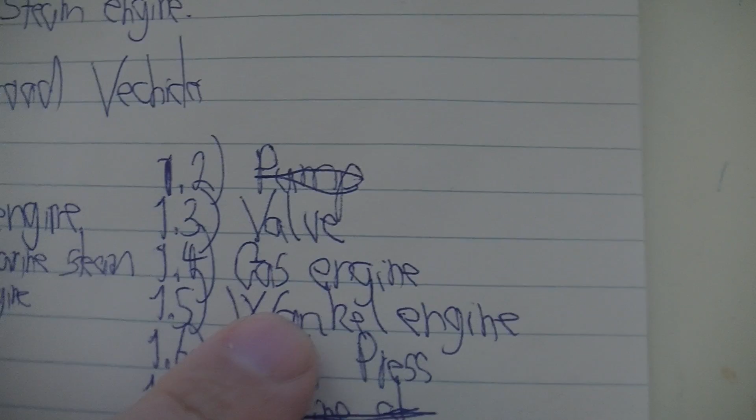But let's continue. Next time is a gas engine, a fruit press, something weird, then I continue there. That will take many days, but that's fine.

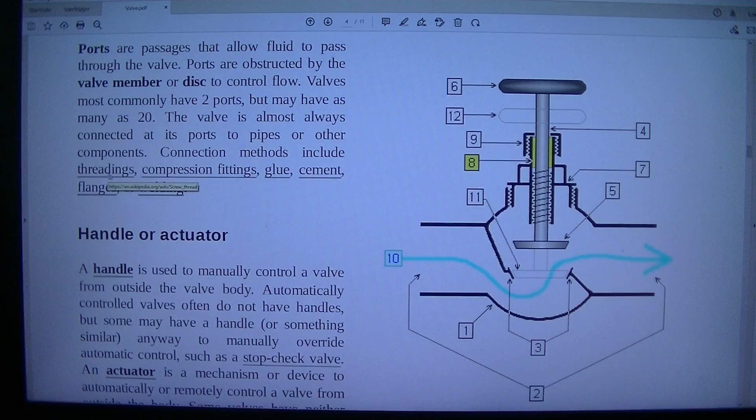I have many hundreds of days alone in my apartment. I've got plenty of time. I don't have money, but I have plenty of time.

But of course I should get out. I should travel, meet some people or something, not just sit home alone, but there's nothing to do about that right now.

Could do that next summer. Next summer I'll have $500 more every month. But not if I lose all my subscribers doing this, then I'll have less.

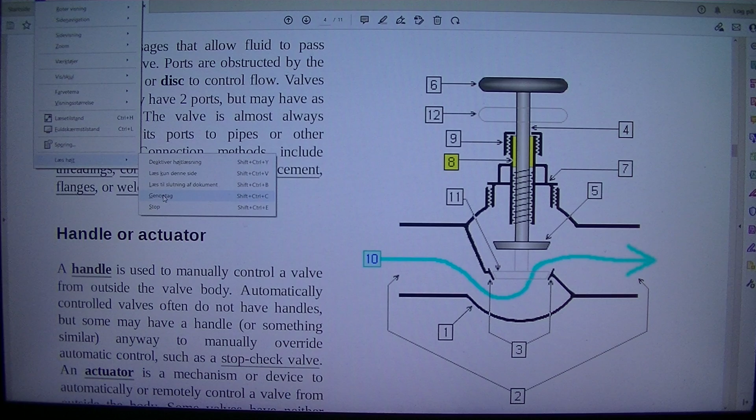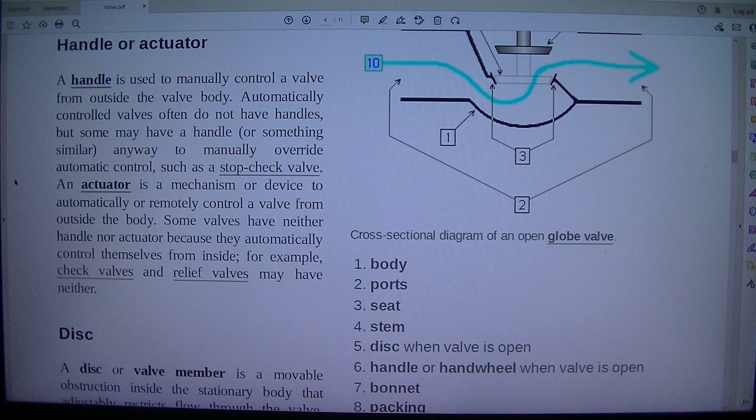Continuing: methods include threadings, compression fittings, glue, cement flanges, or welding. Handle or actuator: a handle is used to manually control a valve from outside the valve body. Automatically controlled valves often do not have handles, but some may have a handle or something similar anyway to manually override the automatic control, such as a stop-check valve.

An actuator is a mechanism or device to automatically or remotely control a valve from outside the body. Some valves have neither handle nor actuator because they automatically control themselves from inside. For example, check valves and relief valves may have neither. Disc.

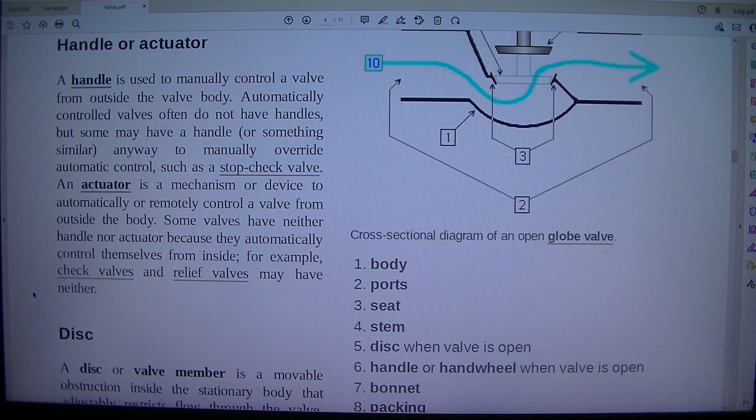Valve disc: a disc or valve member is a movable obstruction inside the stationary body that adjustably restricts flow through the valve. Although traditionally disc-shaped, discs come in various shapes. Depending on the type of valve, a disc can move linearly inside a valve or rotate on the stem, as in a butterfly valve, or rotate on a hinge or trunnion, as in a check valve.

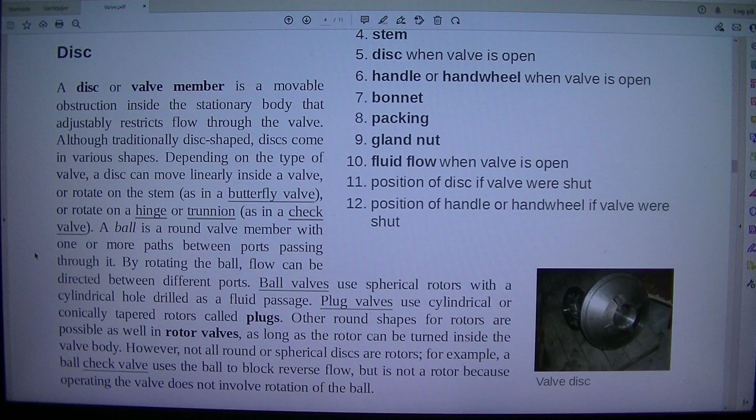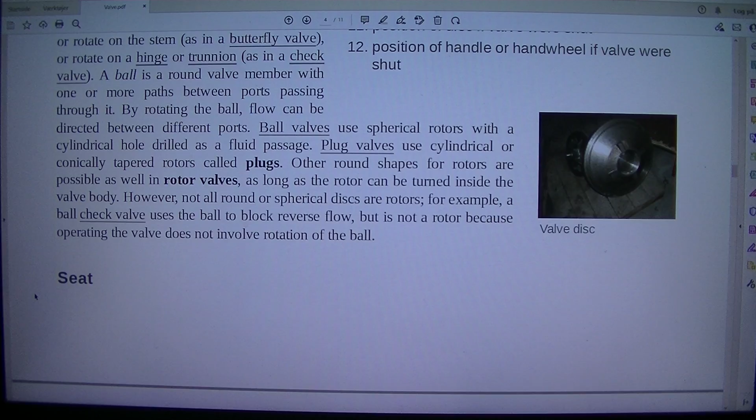A ball is a round valve member with one or more paths between ports passing through it. By rotating the ball, flow can be directed between different ports. Ball valves use spherical rotors with a cylindrical hole drilled as a fluid passage.

Plug valves use cylindrical or conically tapered rotors called plugs. Other round shapes for rotors are possible as well in rotor valves, as long as the rotor can be turned inside the valve body. However, not all round or spherical discs are rotors.

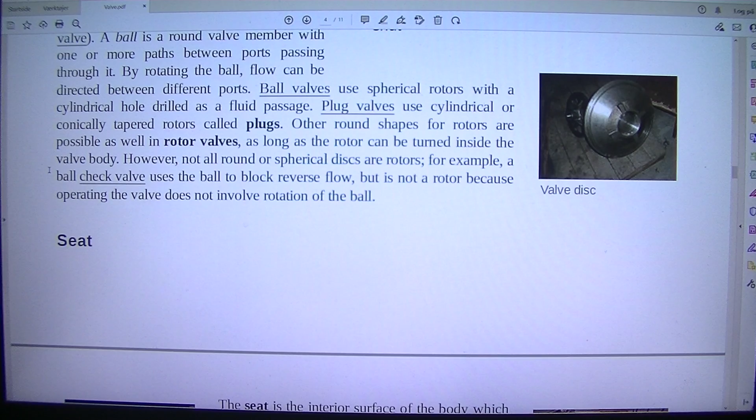For example, a ball check valve uses the ball to block reverse flow, but is not a rotor because operating the valve does not involve rotation of the ball seat. The shut-off butterfly valve for a Francis Turbine at Gordon Power Station, Tasmania, and a ball valve.

The seat is the interior surface of the body which contacts the disc to form a leak-tight seal. In discs that move linearly or swing on a hinge or trunnion, the disc comes into contact with the seat only when the valve is shut.

In discs that rotate, the seat is always in contact with the disc, but the area of contact changes as the disc is turned. The seat always remains stationary relative to the body.

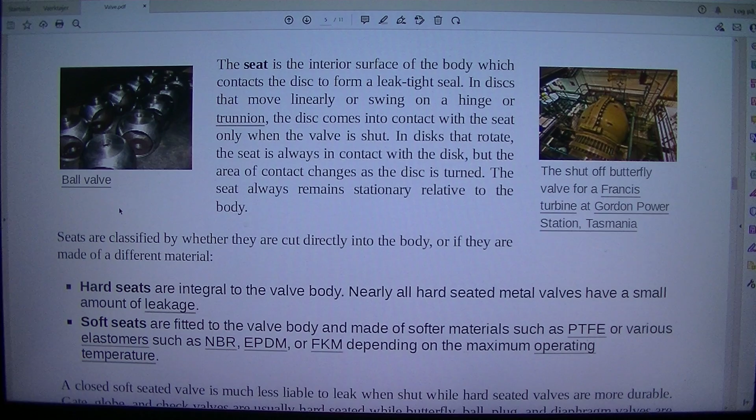Seats are classified by whether they are cut directly into the body, or if they are made of a different material. Hard seats are integral to the valve body. Nearly all hard-seated metal valves have a small amount of leakage.

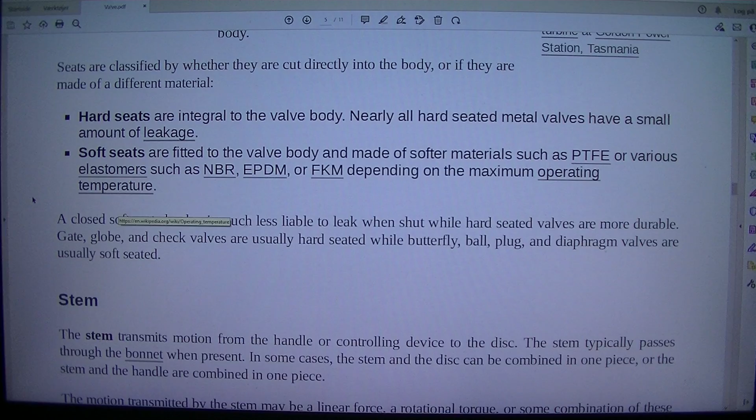Soft seats are fitted to the valve body and made of softer materials such as PTFE or various elastomers such as NBR, EPDM, or FKM, depending on the maximum operating temperature. A closed soft-seated valve is much less liable to leak when shut, while hard-seated valves are more durable. Gate, globe, and check valves are usually hard-seated, while butterfly, ball, plug, and diaphragm valves are usually soft-seated.

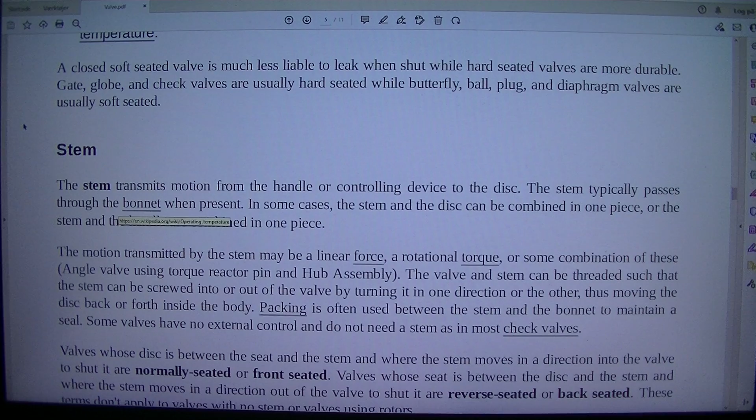Stem: the stem transmits motion from the handle or controlling device to the disc. The stem typically passes through the bonnet when present. In some cases, the stem and the disc can be combined in one piece, or the stem and the handle are combined in one piece.

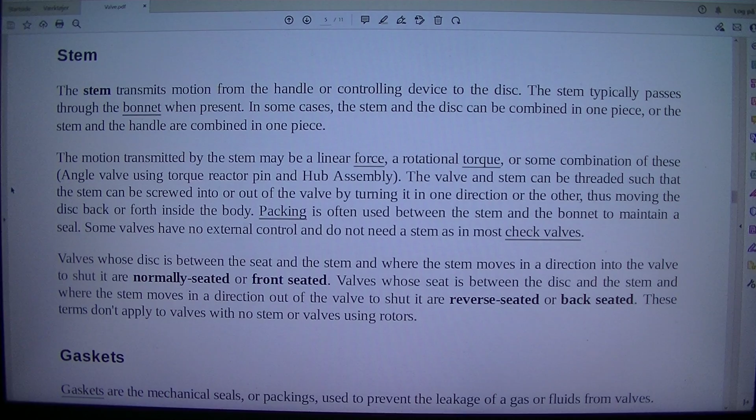The motion transmitted by the stem may be a linear force, a rotational torque, or some combination of these. An example is an angle valve using a torque reactor pin and hub assembly.

The valve and stem can be threaded such that the stem can be screwed into or out of the valve by turning it in one direction or the other, thus moving the disc back or forth inside the body. Packing is often used between the stem and the bonnet to maintain a seal.

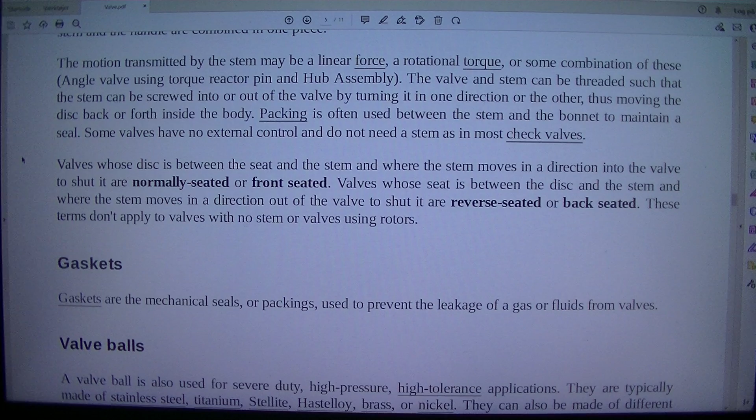Some valves have no external control and do not need a stem, as in most check valves. Valves whose disc is between the seat and the stem, and where the stem moves in a direction into the valve to shut it, are normally seated or front-seated. Valves whose seat is between the disc and the stem, and where the stem moves in a direction out of the valve to shut it, are reverse-seated or back-seated. These terms don't apply to valves with no stem or valves using rotors.

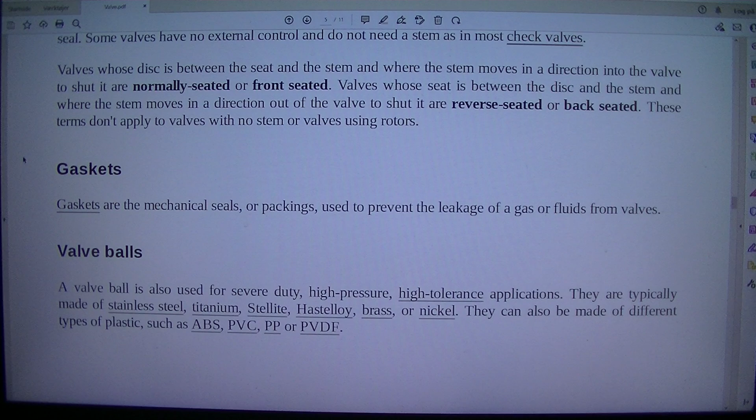Gaskets are the mechanical seals, or packings, used to prevent the leakage of a gas or fluid from valves.

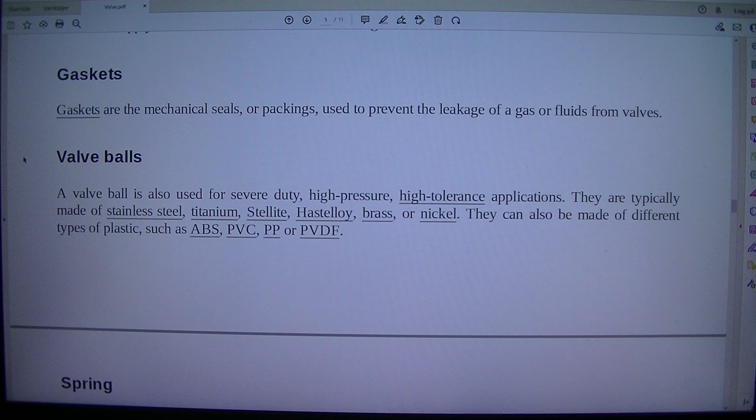Valve balls are also used for severe duty, high pressure, high tolerance applications. They are typically made of stainless steel, titanium, stellite, hastelloy, brass, or nickel. They can also be made of different types of plastic, such as ABS, PVC, PP, or PVDF.

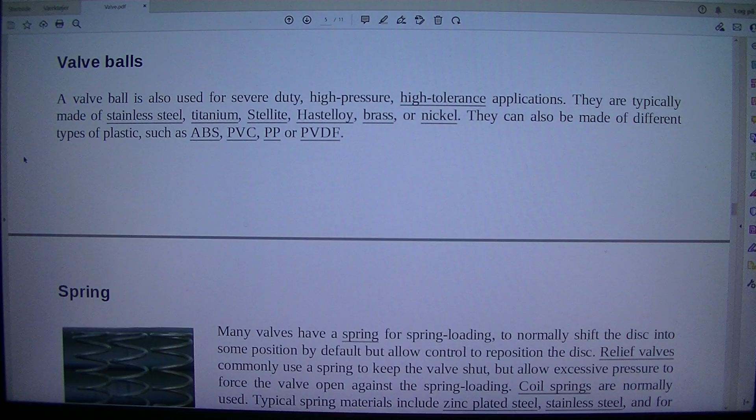Springs, including Inconel X750 springs, are used in many valves for spring loading, to normally shift the disc into a default position but allow control to reposition it. Relief valves commonly use a spring to keep the valve shut, but allow excessive pressure to force the valve open against the spring loading. Coil springs are the most common. Typical spring materials include zinc-plated steel, stainless steel, and for high-temperature applications, Inconel X750.

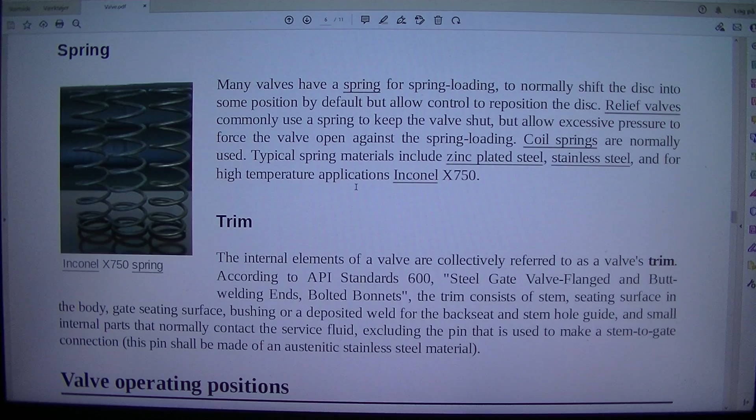The internal elements of a valve are collectively referred to as the valve's trim. According to API standard 600, for a steel gate valve with flanged and butt welding ends and bolted bonnets, the trim consists of the stem, seating surface in the body, gate seating surface, bushing or a deposited weld for the back seat and stem hole guide, and small internal parts that normally contact the service fluid, excluding the pin used to make a stem-to-gate connection. This pin shall be made of an austenitic stainless steel material.

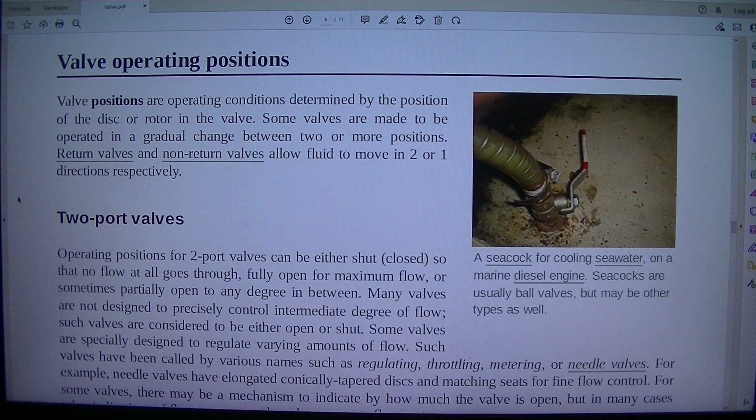Valve operating positions: a seacock for cooling seawater on a marine diesel engine is usually a ball valve, but may be another type as well. Valve positions are operating conditions determined by the position of the disc or rotor in the valve. Some valves are made to be operated in a gradual change between two or more positions. Return valves and non-return valves allow fluid to move in two directions or one direction respectively.

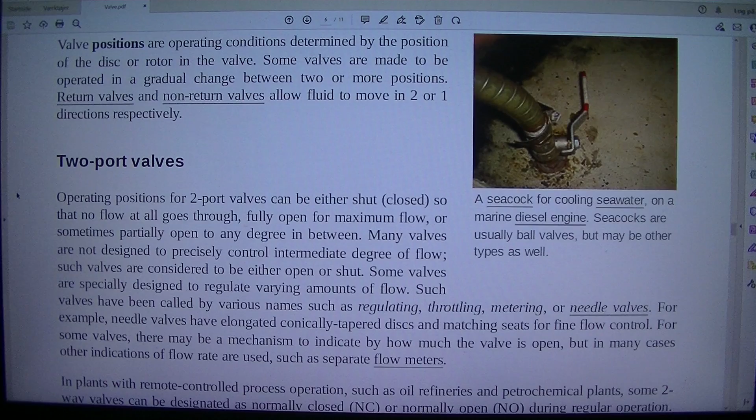For two-port valves, operating positions can be either shut, closed, so that no flow at all goes through, fully open for maximum flow, or sometimes partially open to any degree in between. Many valves are not designed to precisely control an intermediate degree of flow; such valves are considered to be either open or shut. Some valves are especially designed to regulate varying amounts of flow. Such valves have been called by various names, such as regulating, throttling, metering, or needle valves. For example, needle valves have elongated, conically tapered discs and matching seats for fine flow control.

For some valves, there may be a mechanism to indicate by how much the valve is open, but in many cases other indications of flow rate are used, such as separate flow meters.

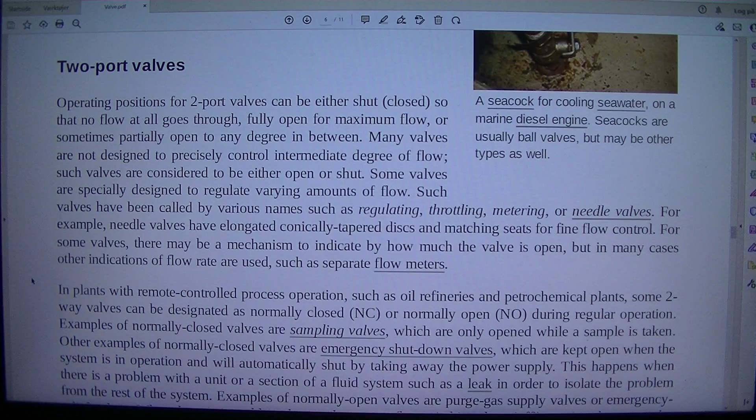In plants with remote-controlled process operation, such as oil refineries and petrochemical plants, some two-way valves can be designated as normally closed, NC, or normally open, NO, during regular operation. Examples of normally closed valves are sampling valves, which are only opened while a sample is taken. Other examples are emergency shutdown valves, which are kept open when the system is in operation and will automatically shut by taking away the power supply. This happens when there's a problem with a unit or a section of a fluid system, such as a leak, in order to isolate the problem from the rest of the system.

Examples of normally open valves are purge gas supply valves or emergency relief valves. When there is a problem, these valves open by switching them off, causing the unit to be flushed and emptied.

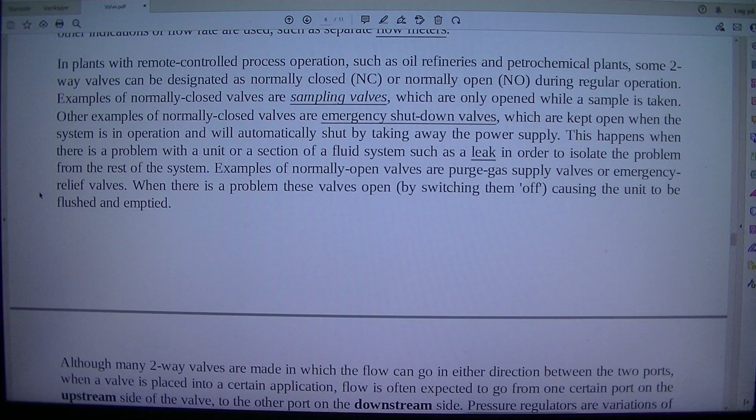Although many two-way valves are made in which the flow can go in either direction between the two ports, when a valve is placed into a certain application, flow is often expected to go from one certain port on the upstream side of the valve to the other port on the downstream side.

Pressure regulators are variations of valves in which flow is controlled to produce a certain downstream pressure, if possible. They are often used to control the flow of gas from a gas cylinder. A back pressure regulator is a variation of a valve in which flow is controlled to maintain a certain upstream pressure, if possible.

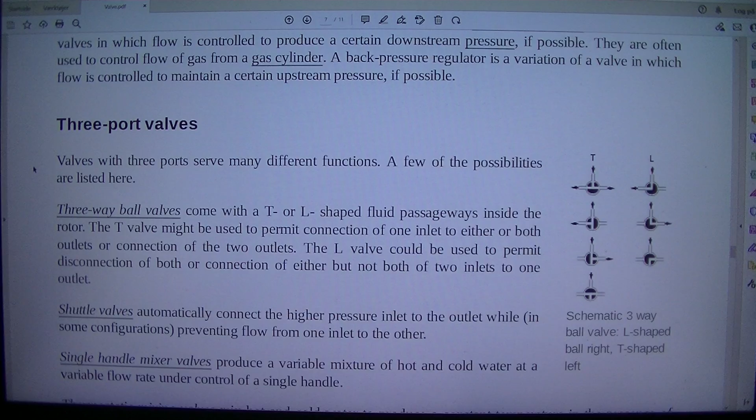Three-port valves: as shown in the schematic of a three-way ball valve, with L-shaped and T-shaped configurations, valves with three ports serve many different functions.

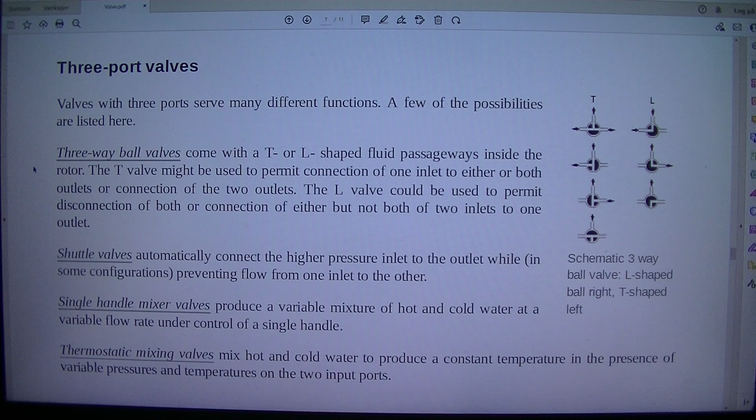A few of the possibilities are listed here. Three-way ball valves come with a T or L-shaped fluid passageway inside the rotor. The T valve might be used to permit connection of one inlet to either or both outlets, or connection of the two outlets. The L valve could be used to permit disconnection of both, or connection of either but not both, of two inlets to one outlet.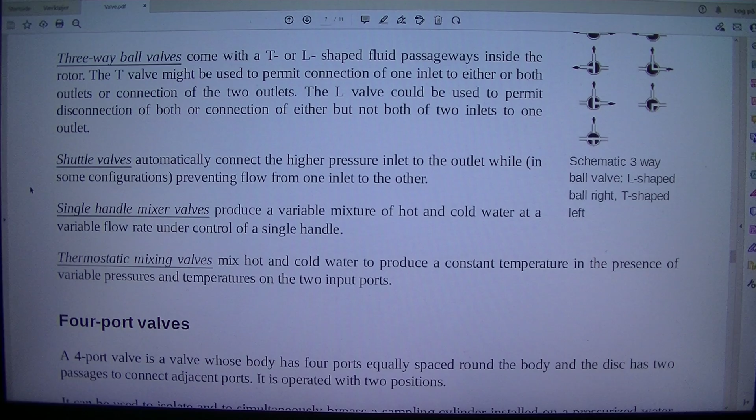Shuttle valves automatically connect the higher pressure inlet to the outlet while, in some configurations, preventing flow from one inlet to the other. Single handle mixer valves produce a variable mixture of hot and cold water at a variable flow rate under control of a single handle. Thermostatic mixing valves mix hot and cold water to produce a constant temperature in the presence of variable pressures and temperatures on the two input ports.

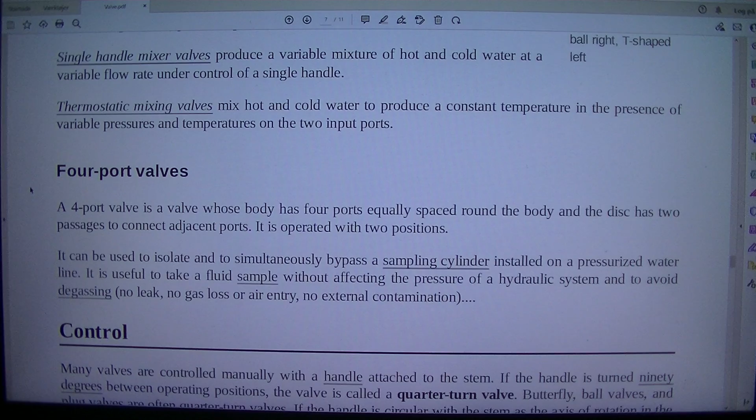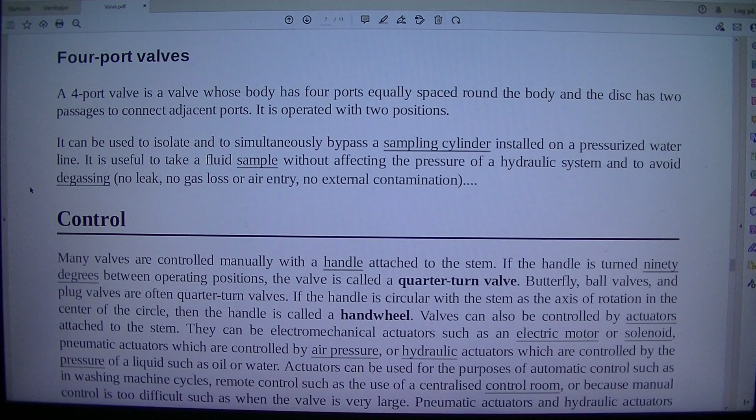Four-port valves: a four-port valve is a valve whose body has four ports equally spaced round the body, and the disc has two passages to connect adjacent ports. It is operated with two positions. It can be used to isolate and simultaneously bypass a sampling cylinder installed on a pressurized waterline. It is useful to take a fluid sample without affecting the pressure of a hydraulic system, and to avoid degassing, leaks, gas loss, air entry, or external contamination.

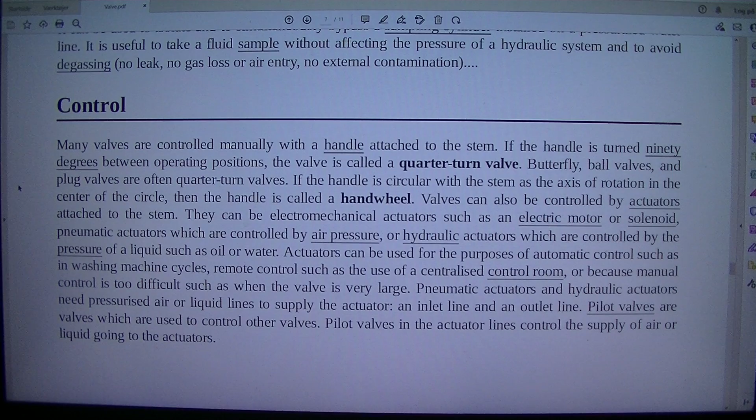Many valves are controlled manually with a handle attached to the stem. If the handle is turned 90 degrees between operating positions, the valve is called a quarter-turn valve. Butterfly valves, ball valves, and plug valves are often quarter-turn valves. If the handle is circular, with the stem as the axis of rotation at the center of the circle, then the handle is called a hand wheel.

Valves can also be controlled by actuators attached to the stem. These can be electromechanical actuators such as an electric motor or solenoid, pneumatic actuators which are controlled by air pressure, or hydraulic actuators which are controlled by the pressure of a liquid such as oil or water. Actuators can be used for automatic control, such as in washing machine cycles; remote control, such as the use of a centralized control room; or because manual control is too difficult, such as when the valve is very large.

Pneumatic and hydraulic actuators need pressurized air or liquid lines to supply the actuator, an inlet line and an outlet line. Pilot valves are valves which are used to control other valves. Pilot valves in the actuator lines control the supply of air or liquid going to the actuators.

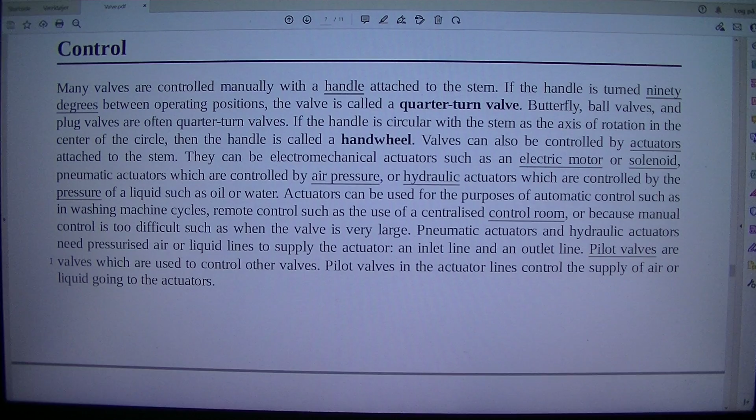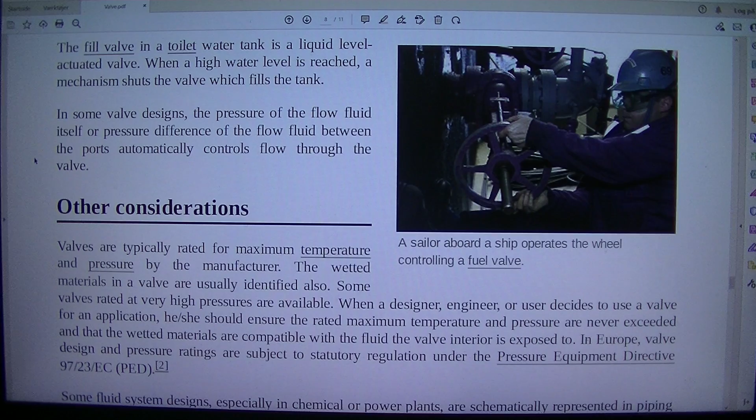A sailor aboard a ship operates the wheel controlling a fuel valve. The fill valve in a toilet water tank is a liquid level actuated valve. When a high water level is reached, a mechanism shuts the valve which fills the tank. In some valve designs, the pressure of the flow fluid itself, or the pressure difference of the flow fluid between ports, automatically controls flow through the valve.

Other considerations: valves are typically rated for maximum temperature and pressure by the manufacturer. The wetted materials in a valve are usually identified also. Some valves rated at very high pressures are available. When a designer, engineer, or user decides to use a valve for an application, they should ensure the rated maximum temperature and pressure are never exceeded, and that the wetted materials are compatible with the fluid the valve interior is exposed to. In Europe, valve design and pressure ratings are subject to statutory regulation under the Pressure Equipment Directive 97/23/EC, PED.

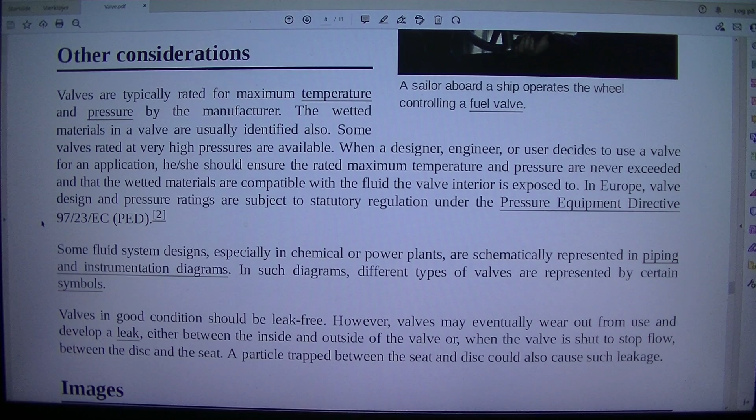Some fluid system designs, especially in chemical or power plants, are schematically represented in piping and instrumentation diagrams. In such diagrams, different types of valves are represented by certain symbols. Valves in good condition should be leak-free. However, valves may eventually wear out from use and develop a leak, either between the inside and outside of the valve, or, when the valve is shut to stop flow, between the disc and the seat. A particle trapped between the seat and disc could also cause such leakage.

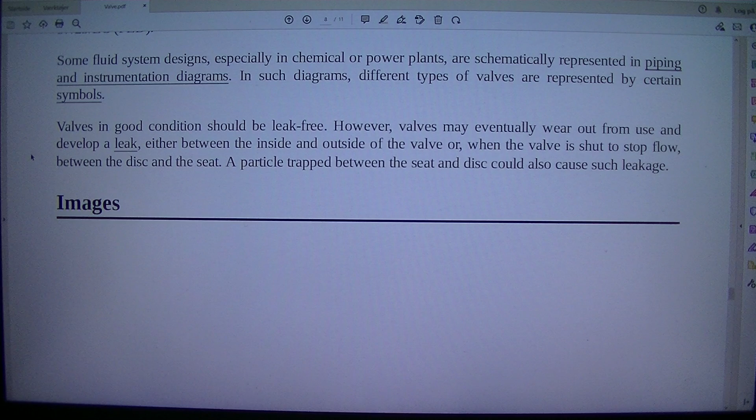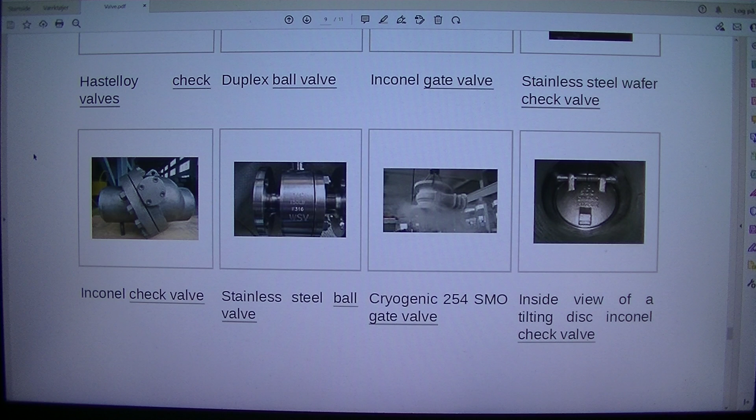Images: globe valve, a valve controlled by a wheel on a vertical line. Large butterfly valve. Cast iron butterfly valve. Hastelloy ball valve. Stainless steel gate valve. Hastelloy check valves. Duplex ball valve. Inconel gate valve. Stainless steel wafer check valve. Inconel check valve. Stainless steel ball valve. Cryogenic 254 SMO gate valve.

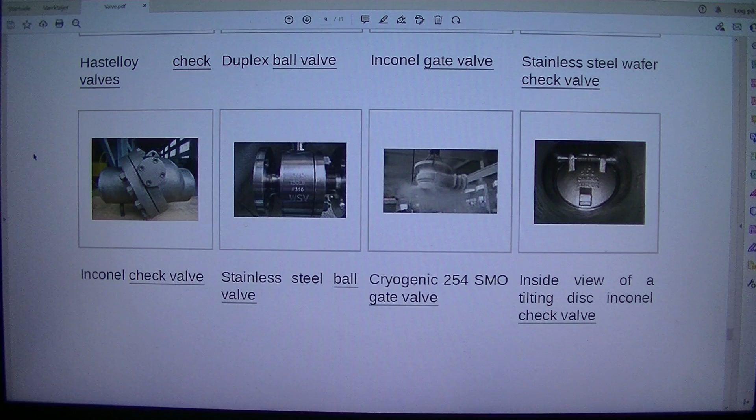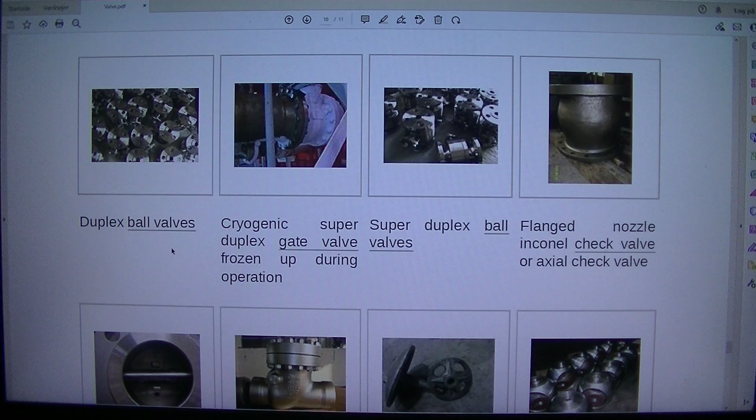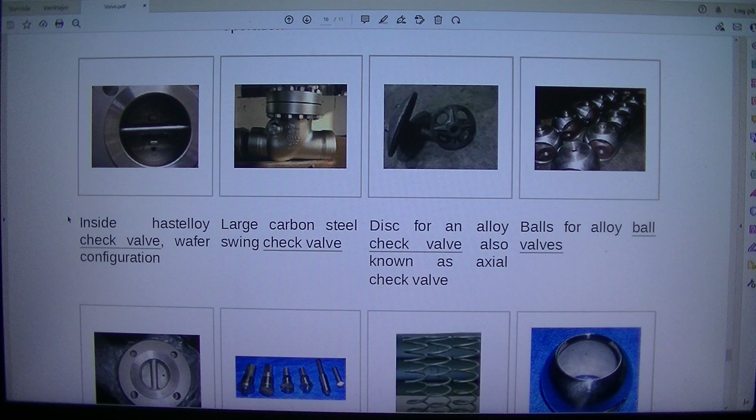Inside view of a tilting disc Inconel check valve. Duplex ball valves. Cryogenic super duplex gate valve frozen up during operation. Super duplex ball valves. Flanged nozzle Inconel check valve, axial check valve. Inside Hastelloy check valve, wafer configuration. Large carbon steel swing check valve. Disc for an alloy check valve, also known as axial check valve. Balls for alloy ball valves. Wafer check valve. Nuts and bolts for Incoloy valves. Inconel check valve springs. Ball for a titanium ball valve.

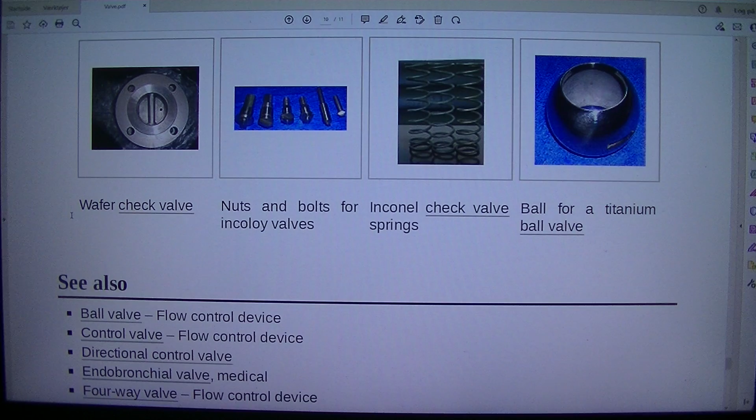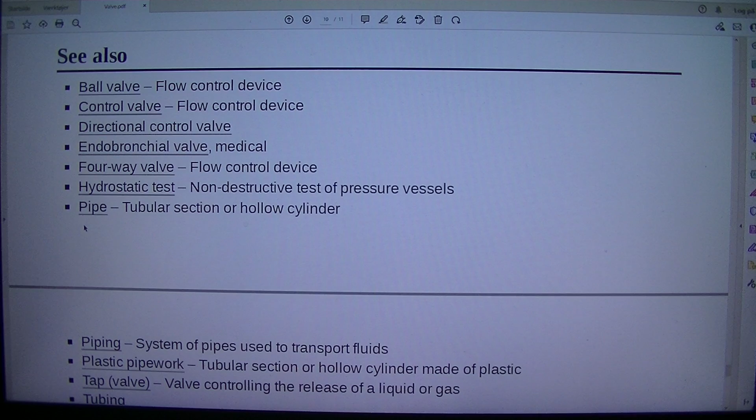See also: ball valve, a flow control device. Control valve, a flow control device. Directional control valve. Endobronchial valve, used in medicine. Four-way valve, a flow control device. Hydrostatic test, a non-destructive test of pressure vessels. Pipe, a tubular section or hollow cylinder. Piping system, a system of pipes used to transport fluid.